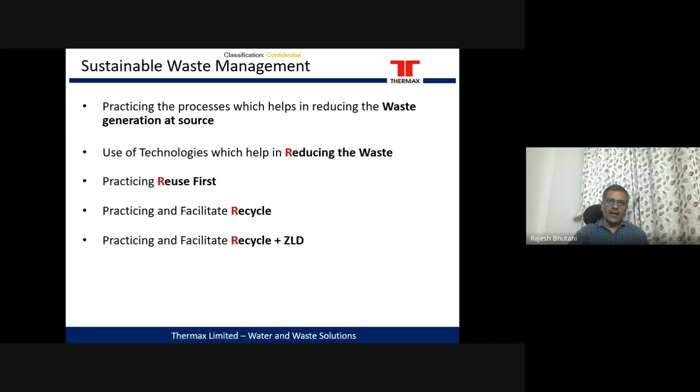What are the benefits of sustainable waste management? These are the major benefits which the industry, or housing societies, look for, so that whatever solutions are there, they are sustainable.

Otherwise, if after putting in a technology the production cost increases, that will directly impact the product which they are manufacturing. It will become expensive, and ultimately people will not buy it. So it is not sustainable.

So they look for solutions which can reduce their energy bills, reduce their water intake bills, and reduce waste disposal bills. Suppose they are producing 100 meter cube per day of water, and if they are able to recycle 95-98%, only 2, 3, or 4% they have to dispose of. So that much only they will have to spend money for disposal. This also reduces waste management infrastructure, because less water is going outside.

In terms of - I give you an example of domestic societies here - they are not treating the sewage at source. So what will happen is, there will be a transport network for the sewage from the housing societies to a common effluent treatment plant, treating it there, and then again there will have to be a transport network for disposing it. But if they are able to recycle within the societies, all this network capacity will come down, or it may not be required at certain places.

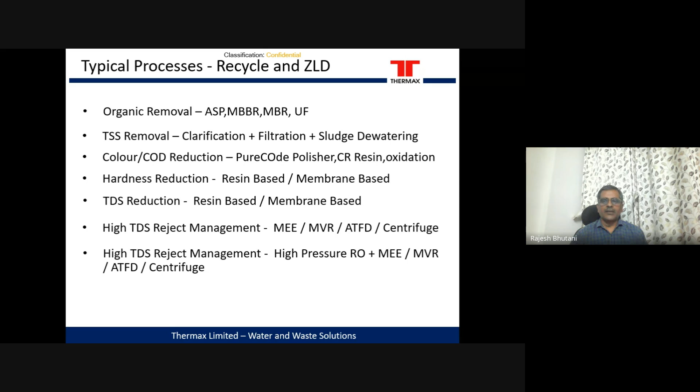But over a period of time, technologies are getting developed wherein high TDS reject management is done by a high pressure RO. Normally seawater used to be the maximum TDS treated, like 60,000 to 70,000 TDS. But when the reject TDS from the seawater is very high, now high pressure ROs are developed so that reject quantities can come down, and your evaporation requirements can come down.

These are the major driving factors for recycle and ZLD plants: one is saving in water costs, recycle water quality, and availability of water from external sources. I shared with you many times, you are ready to pay, but water is not available externally. So that is the major driving force for the industry - in this case, let me go for recycle.

Disposal constraint - the government has not given any disposal lines, so you can't dispose water outside. And even if it is given, the disposal point is, for many companies, say 1 or 2 kilometers away, so it involves pumping costs and infrastructure costs for disposal. Then there is another driving force: since they are going to spend a lot of money treating the wastewater, can they generate some revenue out of it?

So there are treatment processes in particular companies that have generated some revenue from the waste, and the treatment is sustainable there. Then of course they expect the environmentally clean solution. Other driving forces, in some cases, are local issues. Even if you are able to treat the water, meet the government norms, and get disposal permission, local bodies still don't want it. So industries don't want to face these local issues, and that is why they go for recycle and ZLD plants. At Thermax, I will share with you certain case studies.

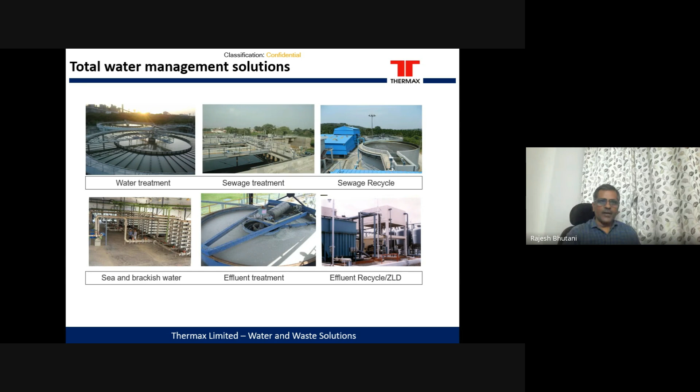But let me just stay with today's topic. I will share some case studies. This is one case study, taken from an urban project, wherein the client's objective was to minimize the fresh water intake. This is only one plant I am taking as an example.

We have plenty of similar plants in Bangalore, Hyderabad, Gurgaon, or nearby Noida area, where there is a lot of water shortage, and the government has given permission for these office complexes based on them recycling the maximum amount of water, with only a certain amount given to them from outside.

The typical characteristics: this is a commercial building. The plant capacity is 1300 meter cube per day, equivalent to 130 tankers per day. Each tanker would cost them 1000 rupees, and there would also be a lot of tankers coming into those complexes, which the housing and commercial buildings don't want. These are IT offices with many restaurants in the area.

So the feed water quantity and quality for this 1300 meter cube per day plant was: pH 6.5 to 8.5, TSS 200 to 450 ppm, COD 300 to 1000 ppm, BOD 100 to 400 ppm, oil and grease 50 to 100 ppm, hardness 200 to 300 ppm, and total nitrogen 75 ppm.

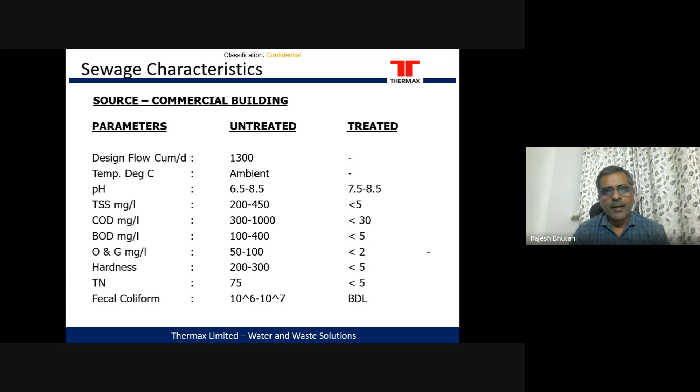This is the typical scheme which was given to similar plants. Coarse screen to remove the coarse matter. Then you saw that there is a lot of oil in the water, 50 to 100 ppm, which is coming from eateries. That oil will be getting separated.

Then, because this is a commercial complex where people will come based on the shifts, the sewage will be coming in based on the shift.

So it needs to be having an equalization tank. Now here, because the quality became stringent, the requirement was to have a membrane bioreactor in place. The membrane bioreactor helped us after biodegradation, filtration of suspended matter and reducing the outlet pollutants. There is a pre-anoxic reactor.

How it helped? The inlet water was having around 75 ppm of total nitrogen. So in the pre-anoxic reactor, around 70 to 75% of nitrogen was removed by operating it in anoxic condition.

The water was led to the aeration tank. In this aeration tank, whatever BOD and ammonical nitrogen was present, it was oxidized in an oxidation and nitrification process. Part of the water was recycled back into the pre-anoxic tank to recycle the nitrates, which can get converted to N2 there.

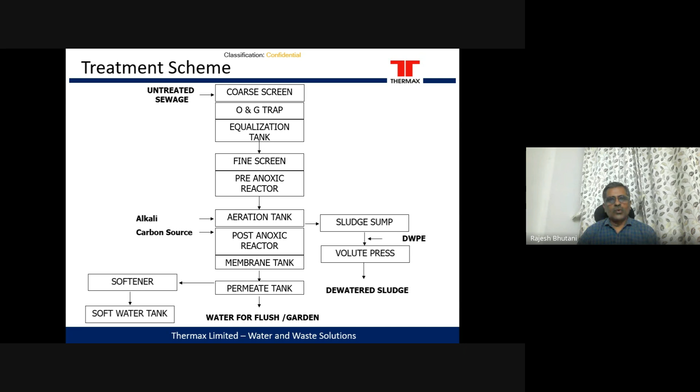What are the benefits they got? Saving of tanker water cost. One other thing which I have not mentioned: every time a tanker enters, security needs to do an entry, and every time the tanker goes out, it needs to do an entry. Then every time the tanker goes to the basement, with so many tankers going, it is an inconvenience to the office people. That is not mentioned here.

They are not dependent on external water availability, so if the external tanker is not available, they can still manage it. They are meeting compliance with respect to government permissions. The government has given them permissions that you will not lose more than 10 or 20 meter cube per day as softener reject or sludge, so they are meeting that. It is an environmentally clean solution because they are not disposing even a single drop in the river, and they are not facing any local issues.

There is another case study which I thought I'll discuss with you, but in between, if anybody has any question, you can ask me.

Sir, is it not possible to use any artificial intelligence in identifying these various parameters? There are so many parameters. Every time after treating, it cannot be checked.

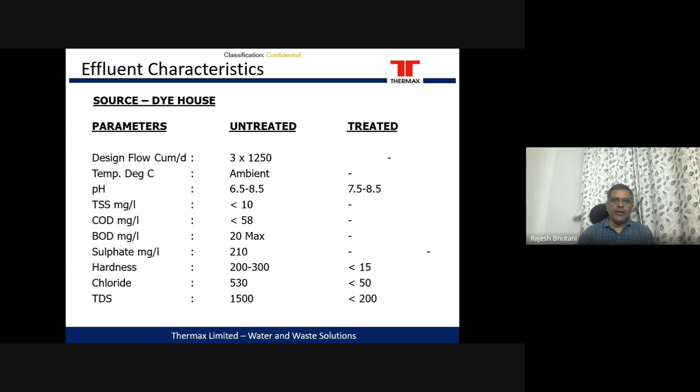So for them, they could have disposed of the water easily. The plant is in Ambasamudram, a very green, hilly area. If they want to save the money, they can easily dispose of it. But there are local issues, so they decided, no, we will be recycling this treated water. This was the scheme which they followed.

This was their existing effluent treatment plant. The first unit, as such in every effluent treatment plant, is a coarse screen, then an oil trap, then flow equalization, because there will be many fluctuations in the quality and quantity of the feed water, which will be absorbed, and the downstream process will be operated at a constant flow. Then they were separating the colors using coagulants and flocculants in a flash mixer, and settling all the sludge into the clarifier, with a lot of sludge going to the screw press.

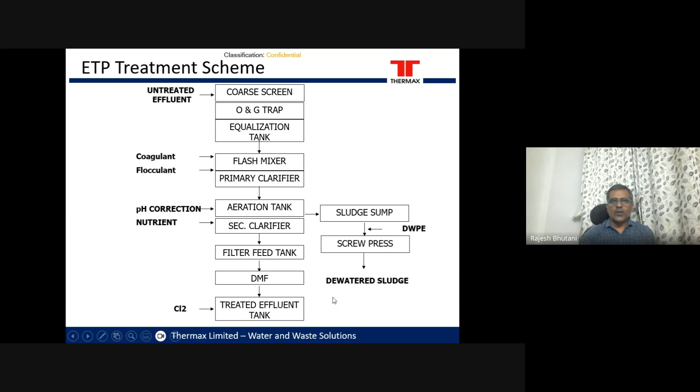Whatever color and suspended matter they removed from the water, it still had a lot of BOD and COD. So they passed it to an aeration system, wherein they have a surface aerator, maintaining MLSS around 2,500 to 3,000, which helps further reduce the BOD and COD. Then it passes through a filter, is disinfected, and after this, the water was coming to our recycle plant.

And this was our recycle plant. We had an auto self-cleaning filter, basket strainer, water going to UF skid, RO, feed tank.

Now you can see RO1, permeate is going, meaning good water quality, water is collected into a tank. Reject is going to RO2, good water is collecting in permeate tank. RO3, good water is collecting into permeate tank. So what they have done, by putting a 3-stage RO, they have increased their recovery. And the concentrate is going to reject tank, MEE, and ATFD.

So in this plant, out of 3,750 meter cube per day, they could recover 93-94% of the water. And this helps them in reducing the capacity of their MEE, because the bigger the capacity, the more water you are evaporating, your operating cost is very high. So this gave them a sustainable solution by having a low water cost in the inlet, at the same time reducing their evaporation costs. We are in further discussion with them, so that we can further reduce their operating costs.

I would like to share with you a very interesting case study. There were about 20 odd textile units. So far we were only recovering the water, right? But there were some 20 odd small textile units. They could not spend much on water, and they were disposing this treated effluent into a common effluent treatment plant. And as such, across India, the common effluent treatment plants are mostly not working.

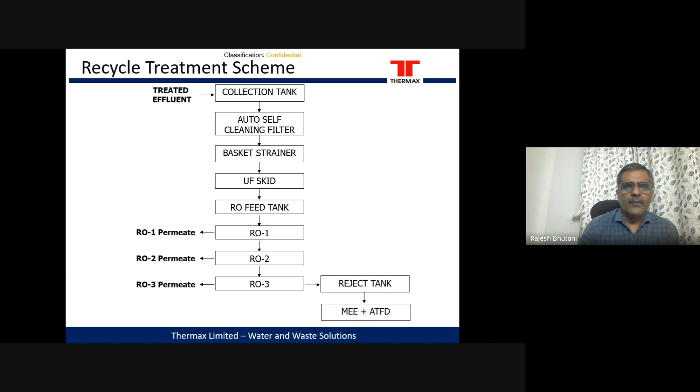The benefit to this particular customer was they were not dependent on external water availability. They were meeting the compliance. The solution was environment friendly for them because all around was a green area and they were not disposing this effluent into that. And of course, their main objective was met, that there were no local issues.

Now, I'll share with you one more case study. But before sharing the case study, if you have any question, you can ask me.

Okay, I'll take you through a case study. Yes, you can ask me. Sir, yeah.

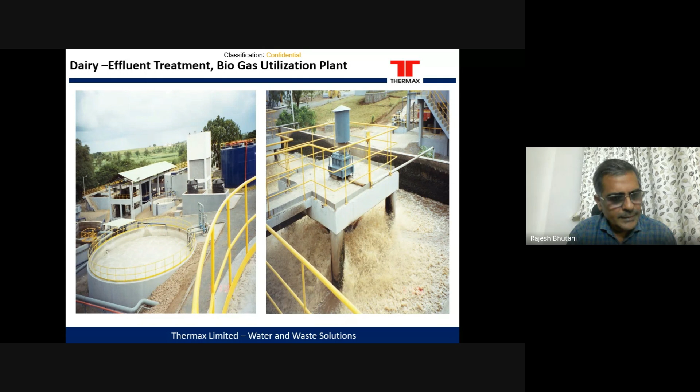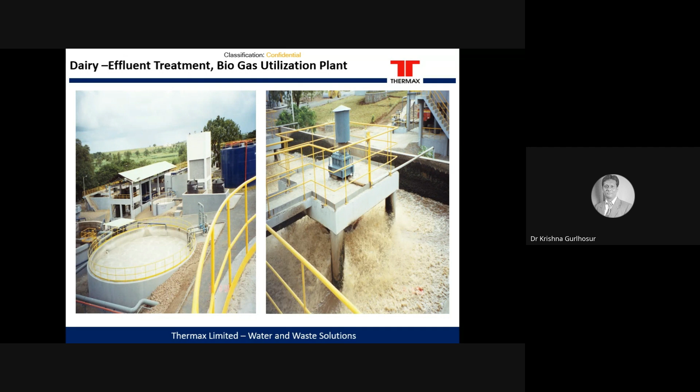Any chronic health issues, as you said, will the locals also have some feedback from this treated water? In case if it is a chronic long-term illness caused because of those pollutant impacts?

See, I have shared the case study with you wherein previously they were disposing, but then they stopped disposing any water droplet outside. They were recycling the complete water into the process. The process, like their production unit, may have a requirement in the actual dyeing process. It may have a requirement in the boiler. It may have a requirement in the cooling tower, from where it is not going for any living being consumption, be it a human being or an animal. It is not going for any consumption, so there is no impact on human beings and living beings because of this.

And plus, the treatment stages are so many that water is getting purified at every stage. And I think many of you might already know, in Singapore, they are using treated sewage. They are filling it in a bottle, and that bottled water is called NEWater. What they are doing is having multiple stages of treatment, and by applying new technologies there, they are able to produce water which is as good as fresh water, and they are able to sustain it.

So in this case, because the treated wastewater is not disposed to the land or outer water body, there is no question of any diseases to them.

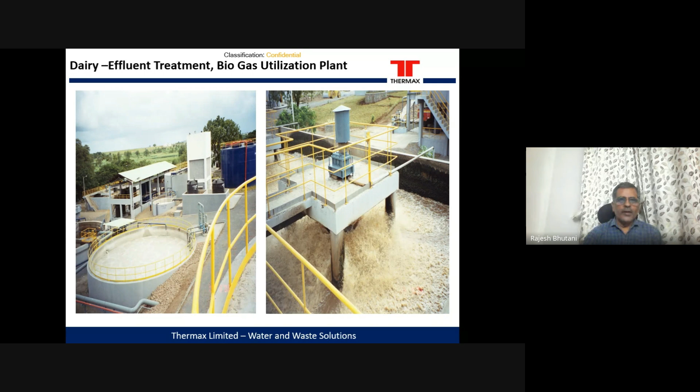In the dairy, they have milk processing, yogurt, juices, everything. Every time the production changes, a lot of wastewater is generated. They make milk, yogurt, and other dairy products, cheese, casein, and out of this a lot of wastewater gets generated.

Initially they were disposing it on irrigation land, so it was having high smell. Their ETP was not capable of handling high COD effluent. Their COD was very high. As such, dairy effluent - milk, curd, paneer, whatever they make - has got a very high oxygen demand.

It was causing groundwater contamination and irrigation was getting affected. Treated effluent quality was not consistent at all - today if they are getting 100 COD, tomorrow it will be 250, another day 300. There were a lot of fluctuations, and because they were disposing on irrigation land, there were a lot of local issues.

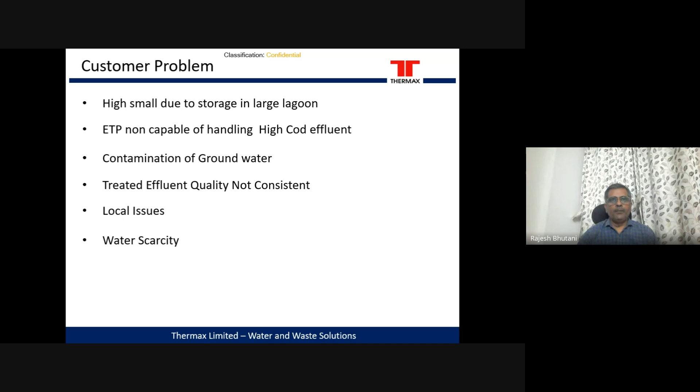Then came a point of a lot of water scarcity. The company thought - we have water scarcity, local issues, our treatment plant is not meeting the norms, and it is contaminating the groundwater. So what can we do? Because with groundwater contamination, even the borewell water they pumped out used to be contaminated, which they couldn't use in production. So they took action.

Their objective was waste to wealth - they had a lot of waste and wanted to produce wealth out of it. So how did they produce it? They treated the anaerobic mother liquor anaerobically. It was having 4 lakh COD, so they produced biogas out of it.

This plant was able to produce about 6,000 cubic meters of biogas, having about 65% to 70% methane, which they could use in the boiler. So how did it help them? Complete biogas used in the boiler, complete effluent treatment plant.

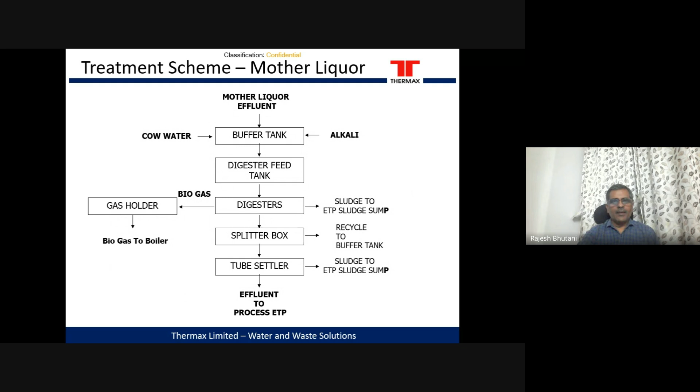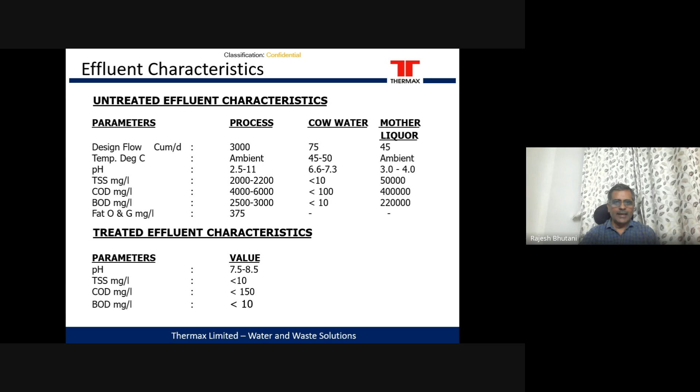Because if one stream is having COD of around 4,000 to 6,000, and another stream is having 4 lakh COD, and both are put into a plant suddenly, then the plant will not work. So how did it help them? It helped stabilize their effluent treatment plant, get the water produced, get the biogas produced for the boiler, and the farmers were ready to accept their water for irrigation. There was no smell when the treated water was put into the ground for irrigation purposes.

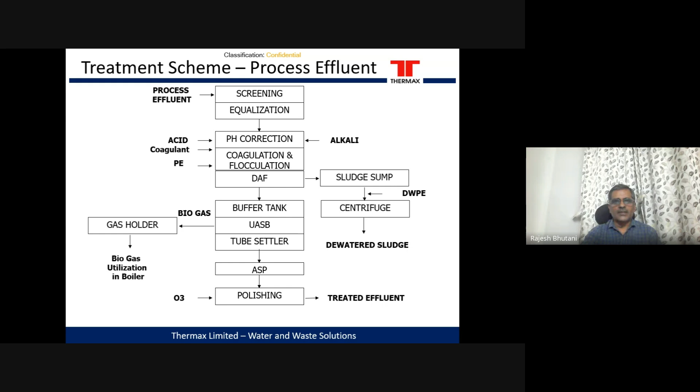These were the benefits: revenue from waste, they could use the biogas. At the same time, farmers bought water from them, which initially they were not ready to accept. Less impact on fluctuation in fuel prices - external fuel prices might change, but as long as you are using biogas as a fuel, these are not impacting you. Less dependent on availability of fuel - you might not be getting fuel from outside, but you are producing your biogas internally, so you are not dependent on external fuel availability.

Less carbon emission into the atmosphere. Recycled water could be utilized for non-critical applications, and there are no local issues. So with this, I'll share with you that when this plant was supplied, they could recover the plant cost in 1 year. And now whatever they are operating, it is free of cost, because whatever investment they had done, they could recover in 1 year by way of utilizing biogas and selling the treated wastewater.

So this is one part of my presentation. I request you, if you have any query, you can ask me so far.

Can you suggest the best treatment process for the grey water without using electricity? Well, there are treatments for treating wastewater without using electricity.

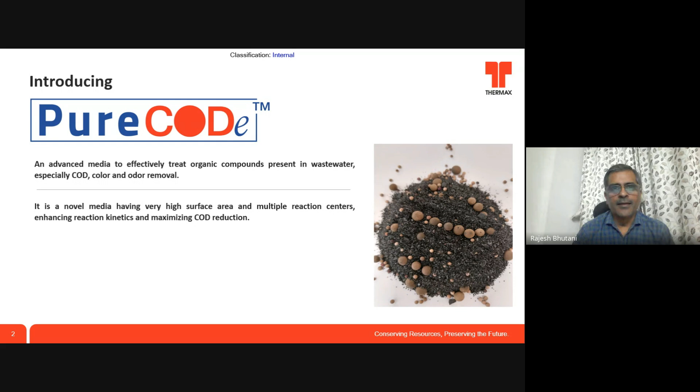It is called PureCODe because it removes the COD. It purifies the water with respect to COD and color. Of course, the standard primary treatment, secondary treatment needs to be used because it is a polisher. It can also be used for higher amounts of BOD and COD.

We have already installed a plant wherein the inlet COD at the outlet of a treated industrial effluent treatment plant was 1800 ppm. But the government had given them permission for disposing 250 ppm COD. So this unit has been working for more than 1 year, wherein they are consistently disposing less than 250 ppm COD at the outlet.

So what this unit has done, it has given them the benefit of not requiring a large area for further treating the wastewater biologically, and large civil volumes are not required. I'll show you the compact photo of this particular plant - it was a small plant, 100 meter cube per day. But if I had given a biological treatment, it would have required around 350 meter cube tank, which is a big tank. Also, a clarification system plus blower - all these things were not required.

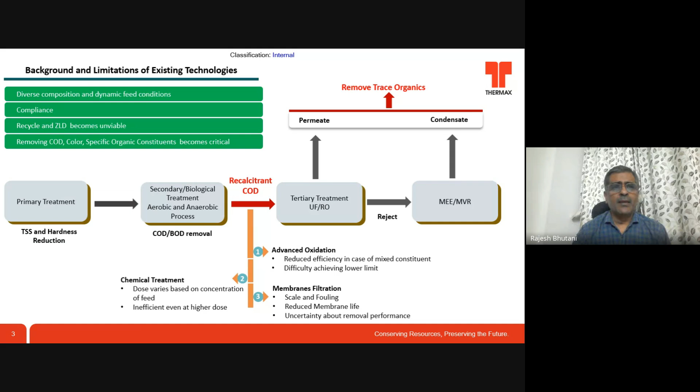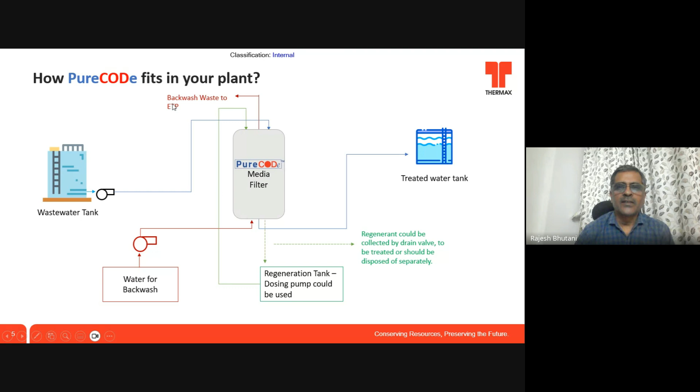So in many plants, the inlet treated water COD - many times you can't do anything about it. COD is say around 300, 400, and the BOD levels are very low, so even the biological system will not do anything. Then you'll have to go for a costly ozonation system, or advanced oxidation. Instead, a small media filter after the existing filters can be used for removing this color.

I'll give you an example. We have a plant in Mumbai, a hospital, with very little space available. Their requirement was to reduce tanker water cost. That plant was about 120 odd meter cube per day, equivalent to around 10 tankers. For the last 2.5, 3 years, they have not bought even one tanker from outside. So they recovered their cost within a couple of months.

So these are the treatment things. This is not applicable only for sewage - this is also applicable for industrial wastewater treatment.

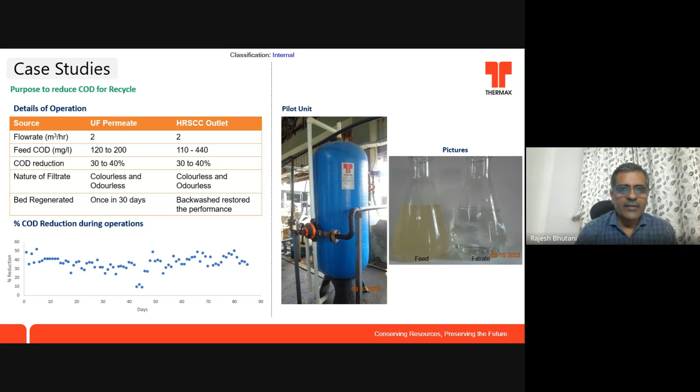I have one more set of photographs to show you. This was the color at the inlet of this PureCODe system in one of the plant's resin units, and this was the color at the outlet. So this complete water was going into the treatment plant. This plant had a two-stage primary treatment followed by a two-stage biological system. All the parameters at the outlet were within the norms, but because of this color they could not use it. So initially they thought of having an RO plant, a UF plant, but this is the solution we provided - if only color is the problem, then we can remove it by this unit.

As you must have seen in all these case studies, there is no common single solution for each and every application. When we give a solution, we try to understand what their issues are, what the feed water parameters are, and which unit operation we can use. In places where the BOD and COD levels are high, I have to give the biological system. Where BOD COD is within limits but TDS levels are high, I will have to go for a reverse osmosis system. For industries where treated effluent TDS is also high, colloidal silica is high, and other colloidal matter is high, I might have to give an ultrafiltration system and an RO system.

Yes, we have all the solutions here to provide to industries, and we are still working on various new technologies which we can provide to industries and for domestic applications, to meet the main goal that the water should be recycled and it should be completely zero liquid discharge. If you have any questions, you can ask. This solution we can provide to steel industries, refineries, pharmaceuticals, chemical industry, and fertilizer - and we are the first to provide it in India.

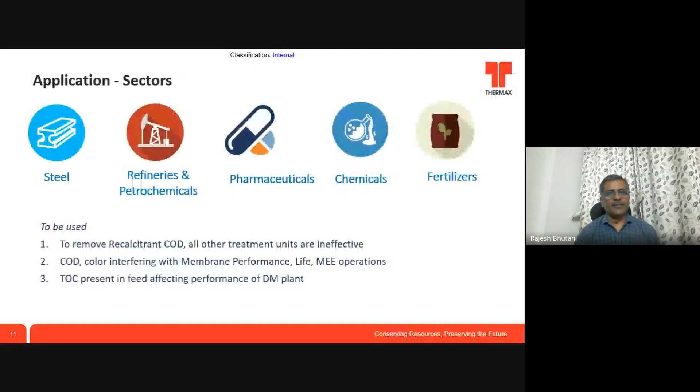I'll be very happy to take the questions. This is the end of my slides.

No sir, it was a very nice presentation with very detailed explanation. I think there's no need to ask anything, everything is discussed. So nice of you, sir, you explained it very, very well.